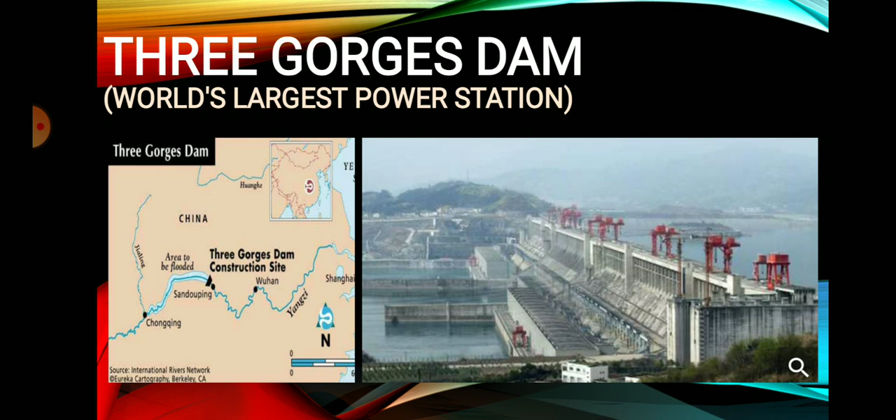We're going to present a briefing on the topic Three Gorges Dam. A subheading is written under it: World's largest power station. Why is it so? Because it produces the highest amount of power. If we talk about dams, then it produces the highest amount of power. Content, you can quickly read the content. I am skipping this. We will go through every content one by one.

So, general information about this dam: it is located in China. Main location is in Sandouping, Yiling district, in Hubei. The main purpose of this dam is to serve the power requirement of China, to control the flood level, and navigation. Status of this dam is operational.

Construction of this dam began on December 14, 1994. The opening year of the dam was 2003. The total construction cost of this dam is US dollar 31.765 billion. The owner of this dam is China Yangtze Power. Basically, it is a subsidiary of China Three Gorges Corporation. As we know that it is located in China, it will be a subsidiary of the Chinese government also.

Now we will quickly cover the topic dams and spillways. Basically, it is a gravity type dam constructed on the Yangtze River. Height of the dam is 181 meter. Length of the dam is 2335 meter, width at the top, means at the crest, is 40 meter, and width at the base, means at the bottom, is 105 meter. Spillway capacity is 1,16,000 cumecs. Cumecs means meter cube per second.

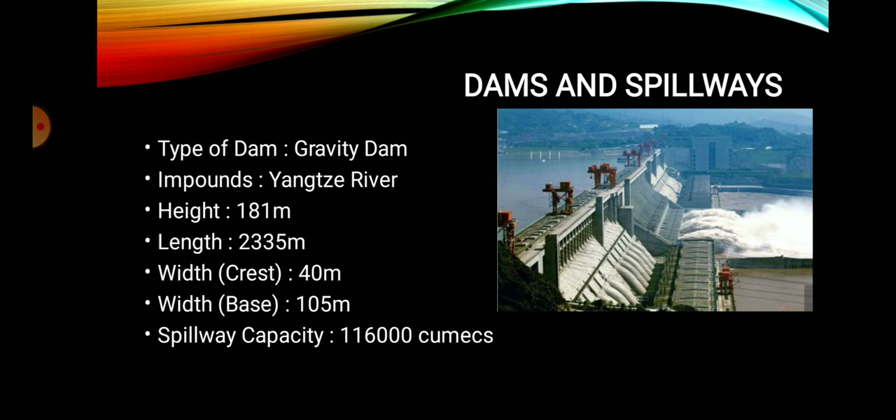Reservoir. The reservoir is also known as Three Gorges Reservoir because it is associated with Three Gorges Dam. The total capacity of this reservoir is 39.3 cubic kilometers. The catchment area under this reservoir is 1 million square kilometers, and the surface area of this reservoir is 1084 square kilometers, which is quite a high area. Maximum length is also huge, 600 kilometer. Normal elevation of this reservoir is 175 meter.

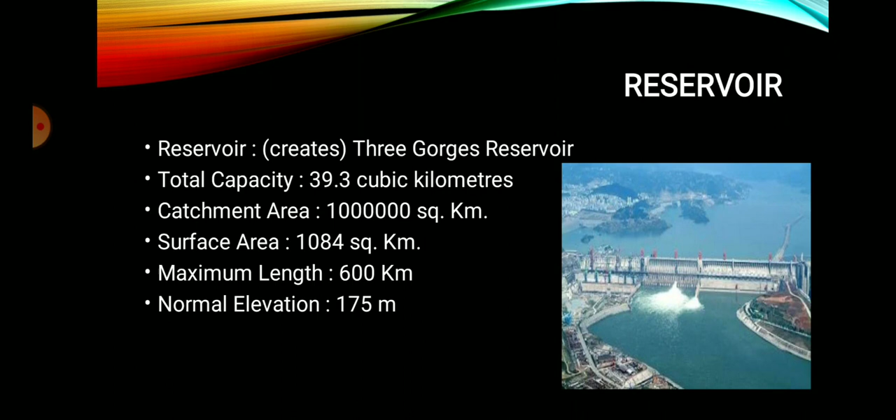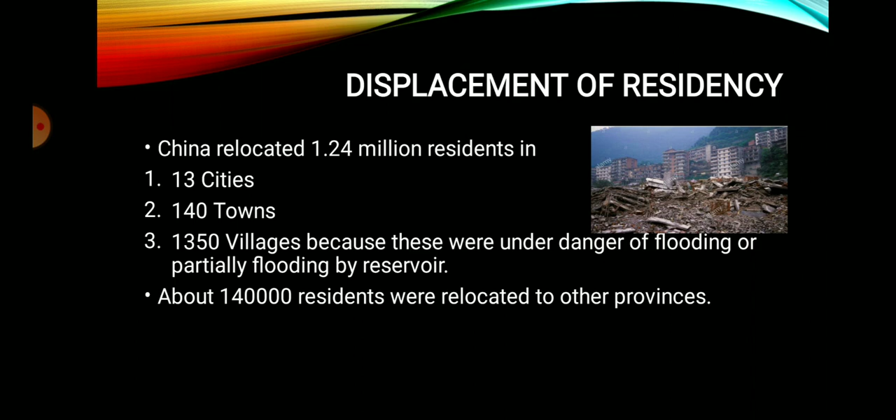Okay, about 140,000 residents were relocated to some other provinces. That means they were shifted to some other parts of China. This figure also shows what devastation can occur through this dam.

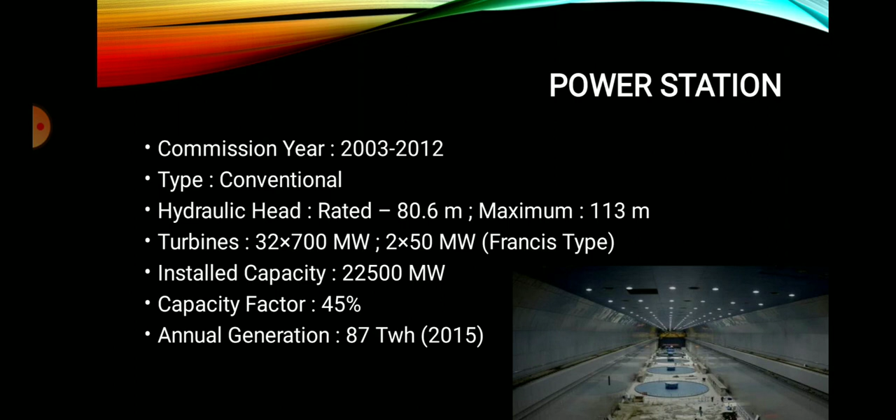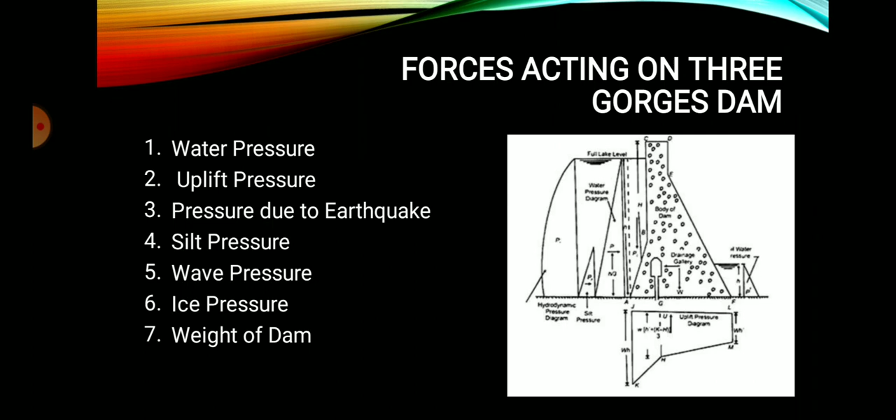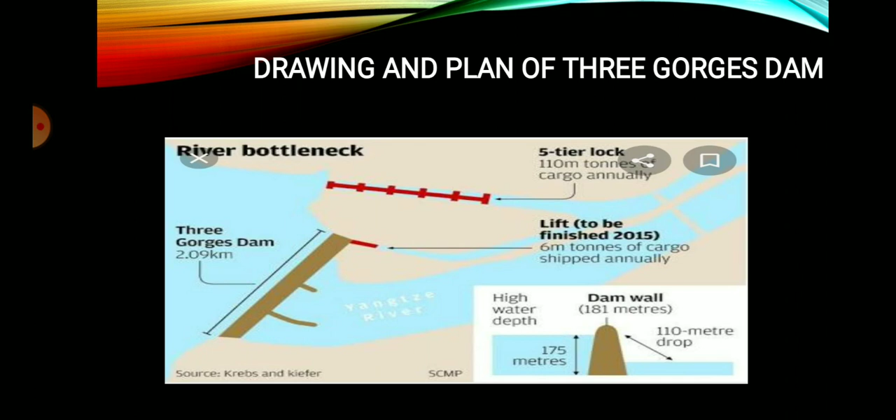Uses of Three Gorges Dam. There are three main uses, as we have already talked about: irrigation, power generation, flood control, and navigation also. Why are we choosing the topic irrigation? Because Beijing has been experiencing drought since 2016 or 2017. So Beijing is hurriedly using increased water discharges from this dam to irrigate their dry farmland.

Okay, power generation. We have already talked about how this dam generates 22,500 megawatt power. Okay, flood control. This dam helps in controlling floods in many regions of China. We have already talked about the main purposes of this dam. So these three are the uses, or the main purposes, of the dam.